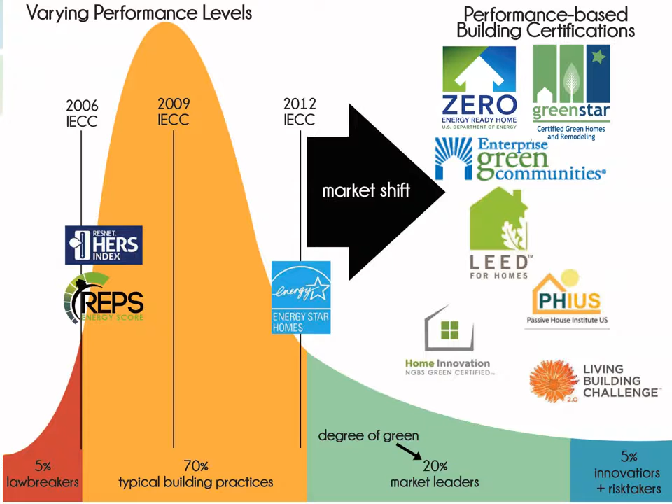So, as we go through this, it's about identifying where you see yourself. And so many of these programs fall into different levels, all the way from, on the left side of the bell curve, building and remodeling homes without following the energy laws, all the way to following the current energy codes, and then moving into the market shift, being a green leader, and then looking at the 5%, the risk takers. Which of these programs sort of delve into that 5%, and really where do you see yourself along this scale?

So we covered a lot about why green building, green home certifications, and then some of the baseline energy programs. And so what you'll find again is that each of these green rating systems that we're going to cover build on successfully utilized energy programs as their baseline. If they want to be successful, they usually model themselves and attach themselves to things that are working in the market.

So the first program I want to go over is the National Green Building Standard, which is a third-party green home certification that was developed by the National Association of Home Builders, and now has been handed off to the Home Innovation Lab, who, from a branding standpoint, you might not be able to tell, but they are an entity of the National Association of Home Builders.

So the first thing to note about the National Green Building Standard is its energy performance pathway baseline, and that's built on the International Energy Code Council's IECC 2009 iteration as its baseline for its mandatory energy requirements, which is just recently improved from the 2006 IECC, which is about a 15% energy efficiency improvement, just the baseline to National Green Building Standard.

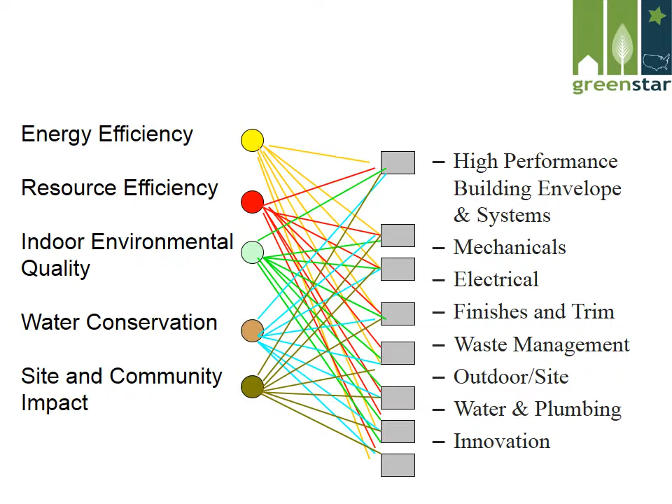All sorts of guidance. What this program is looking at is these 5 key concepts: energy, resource efficiency, indoor environmental quality, water conservation, site and community impact. And what it's looking at is how each of these affect the different systems in a home: high performance building envelope systems, mechanicals, electricals, finishes, trims, waste management. How does each of these 5 levels of green improve or maybe even harm one of the different sections of the house? And then Green Star gives guidance on ways that the tool can be utilized to make the best decision for a whole systems approach across the 5 key categories in each of the sections of the house.

The credit weightings, this is really heavy on energy, which makes a lot of sense. Most of your opportunities lie in energy, so about 50% of the points you're looking at are in your energy efficiency section, and then about 15%, give or take 5 or 7, are at water, indoor environmental quality, site and community impact, and resource efficiency.

Third-party inspections and auditing: in the past, if you're familiar with LEED Online, this program kind of worked like that, where the homeowner could submit a ton of documentation to Green Star admin, and they would review all of this documentation, and they might have a BPI rater or a HERS rater come by and do some testing. Now we're actually looking at third-party Green Star rater inspections, inspecting everything on the site, ensuring that everything that was installed is actually there, and then submitting that documentation to the reviewer in Minneapolis, and then actually having on-site quality assurance auditing being done on the raters.

Education resources: there's a free online training to use this program. You can go through that training at your own leisure. There's a free 400-page manual with guidance, along with a free checklist that you can download and utilize at any time. Once you go through the training, you'll probably find that you want to get qualified to work and certify an actual project. So there are some fees to that, and there are many different ways to get qualified depending on what your needs are. There's online live sessions, and then there's pre-recorded on-demand sessions that you can go through and take a test. You can do a design charrette on a real project for busy professionals. That's highly recommended. Or there's full and half-day trainings across the Midwest as well.

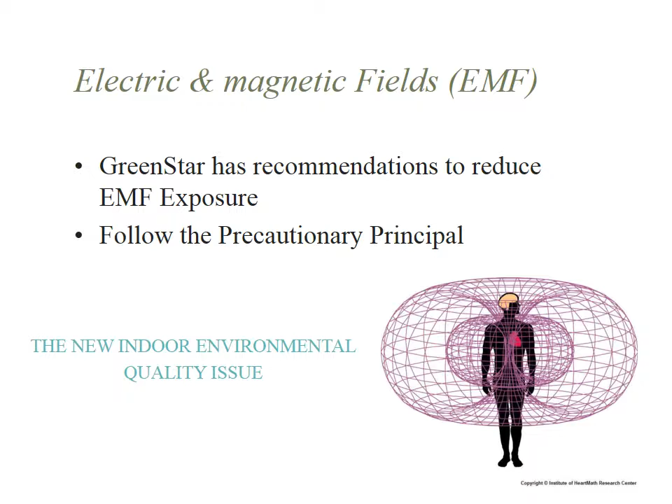And in summary, this is a regionally relevant program in cold weather. If you're in the Pacific Northwest, if you're in the Southeast, probably not for you. Best for light or moderate remodels or weatherization versus many other programs. It really has its strength there. It's much more affordable. It's non-political. It is membership and sponsorship supported and based, so that's a unique thing about it. It has a multifamily pilot underway. It has a recognized accreditation program focused on residential, and currently has a very complicated, cumbersome checklist, but upgrades are coming soon.

And of course, Green Star would want to give a shout out to other regionally relevant programs that are a part of the National Green Home Certified Coalition. So if you're doing a remodel or new home in the South, you probably want to use the EarthCraft program. If you're in the Pacific Northwest, check out Earth Advantage Institute and their great program. Green Built Texas, and Build It Green in California has some amazing tools.

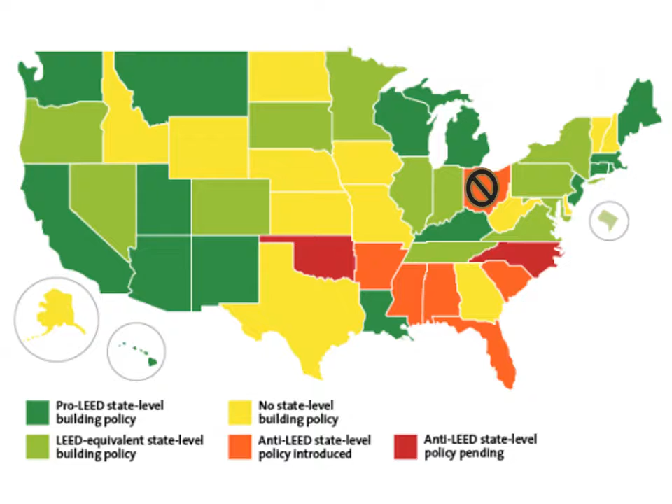LEED for Homes 2008, much like the new construction rating system, is slated to update to version 4. This has been held off and is now slated for October 31st, 2016. The current LEED for Homes version 4 is open. It's beyond its pilot phase, and you can use it now, but 2008 will no longer be available as of Halloween 2016. Some of the things to look for are Energy Star version 3 being the baseline to the program instead of version 2, which requires having a credentialed heating and cooling contractor, using the water management checklist, and then having an HVAC checklist as well.

It does remove the entire durability portion of the LEED program, which to some degree may make it easier. Another thing they're looking at is energy and water use monitoring is going to be a little more prominent. A little more of a life cycle analysis on the impact of the material choices in the homes. A little more focus on urbanization and access to community resources for LEED homes. By no means will rural homes be disqualified, but there'll just be more of a focus on that location efficiency,

urbanization. Water performance: they use the EPA's new water budget tool, which you can check out now if you're designing any kind of landscaping. You can't use it for the current LEED program, but there will be an entirely water performance indoor and outdoor pathway for the LEED for Homes rating system. And they have removed the LEED home size adjuster, but Energy Star 3 still has its own home size adjuster, which is kind of built into that. We do have more resources on our website for understanding the LEED for Homes version 4 process if you want to utilize it now.

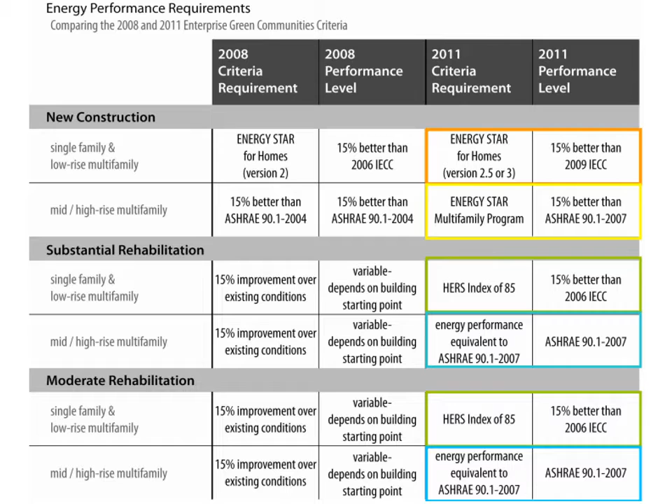Interestingly, there's a chart that we will provide as a resource here that kind of shows how the 2008 Green Communities compares to the new 2011 standard, and whether it's single family or multifamily, mid-rise or low-rise, and whether it's new construction, substantial rehabilitation, or a moderate rehabilitation. A lot of that can change the different types of energy scores you're going for.

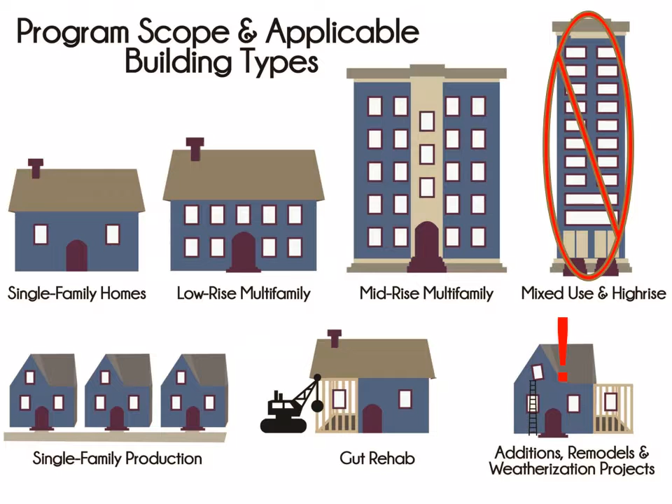Green Communities works on all sorts of building projects: single family, low-rise, multifamily, mid-rise, mixed use. If you're using mid-rise, you're using the ASHRAE standard, just like LEED, and doing energy modeling. Gut rehabs, and then again, additions, remodels, and weatherization projects can use the moderate rehab pathway under the Green Communities tool. Mixed use and high-rise really don't apply in this system. And at the end of the day, again, this is mostly developed for affordable housing developers.

So we're looking at the different sections of green: integrative design, water conservation, energy, location and neighborhood, operation and maintenance, healthy living environment, site improvements, and materials beneficial to the environment, which is what they name their categories. In Green Communities, you must comply with all of their mandatory criteria. They have a lot of prerequisites, just like LEED. Earn 35 optional points if it's new construction, or just 30 optional points if it's a moderate or substantial rehab. Compared to LEED or the National Green Building Standard, it just has quite a bit of prerequisites to get to this level

of certification at all. From a third-party standpoint, you're looking at a second-party HERS rater, which is often a third party, going in and doing at least the energy audit for the HERS index and then the Energy Star program. It's not required to have a third-party inspection unless they're audited for anything outside of energy. And I have never heard to this day of any Green Communities project ever getting audited. I think it's just something they plan on doing in the future.

Third-party documentation submittal, online review and feedback. So you submit through their online web portal tool. It's almost like LEED Online if you're someone who's coming from that world. There's lots of documentation you have to do, but at the end of the day, it is free to submit. So it's really great to take advantage of utilizing them and working with them if you have an affordable housing project that you're working

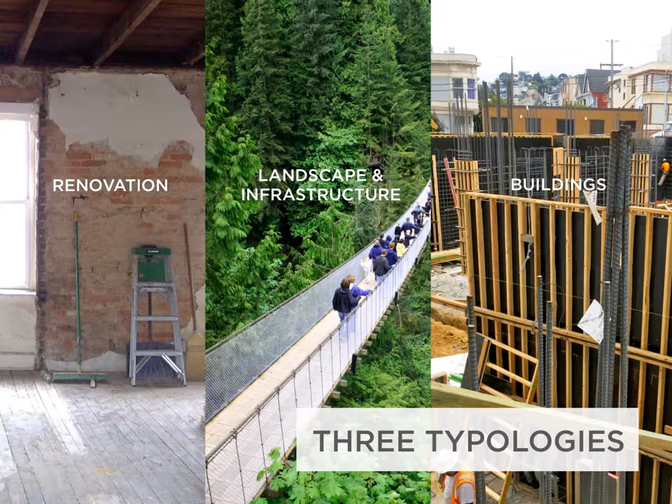The Living Building Challenge was developed by the Cascadia Green Building Council, who launched the International Living Future Institute out of the Pacific Northwest, and their mission is to lead and support the transformation towards communities that are socially just, culturally rich, and ecologically restorative. These programs can be used on renovation projects, land and landscape and infrastructure projects, and obviously whole building.

There are some differences on where you are building, and you have to identify that, all the way from a natural habitat preserve to a rural agricultural zone, all the way into L6, where you're in an urban core zone like downtown New York. So depending on where you find yourself, there are some different ways that you have to build on your project. This program is applicable to essentially everything. It even has a neighborhood scale, so you can use it on any type of project, especially with what we're talking about on the residential.

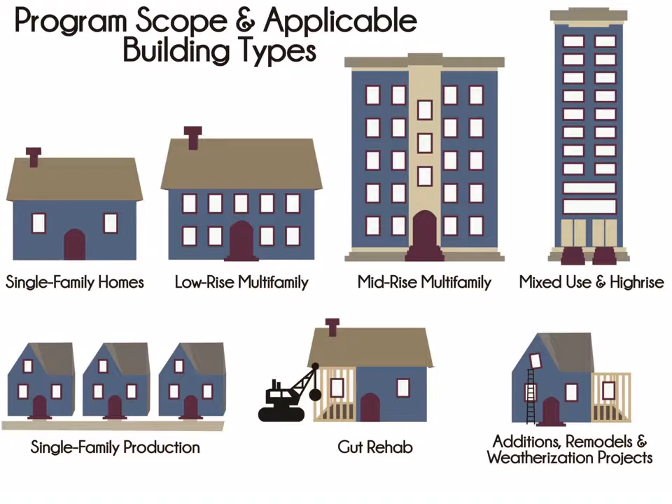So the Living Building Challenge metaphor is the flower, and it's broken down into petals. We've got place, your relationship to the space that you're in; water, which is essentially net zero water, black water remediation; energy, which is essentially net zero energy, commissioned systems. Health and happiness is interesting, so they're looking all the way from air quality and doing air quality testing after the project is done, to mental well-being, such as how are people connecting with nature in the space, is biophilia present, is there that increase in mental health.

Materials is a very tough petal to achieve. We're looking at essentially non-toxic, more regionally sourced materials that have a life cycle analysis, trying to determine where they're going to go at the end of their life. So, for example, PVC is not allowed. So there's some issues there with electrical wiring, with roofing.

And then, interestingly enough, this program departs here from other green building programs when it gets into the equity and then beauty aspects. So, a socially just project. How does your building lend to the culture of the area? Is the building beautiful? It needs to be verified to fit into the neighborhood that it goes into and not be an eyesore or negative.

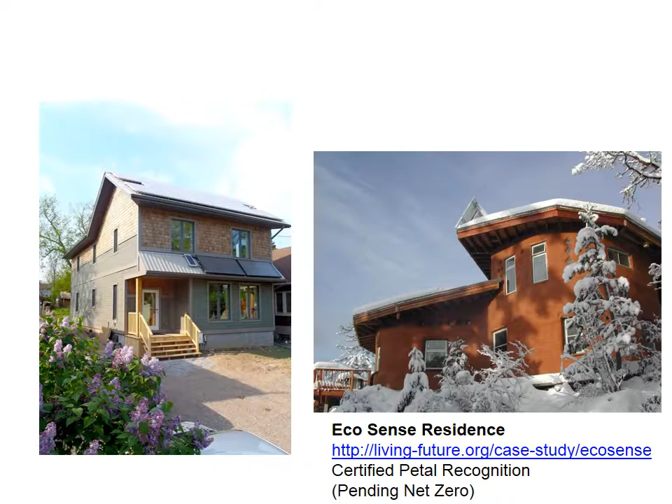We're real excited to be working with the Burbeck at Beacon Springs project. This is hopefully the first Living Building Challenge home around Ann Arbor, Michigan, within Michigan, that's underway. A really exciting project. The Nest is going to be a gut rehab Living Building Challenge in the Baxter community of Grand Rapids, Michigan, helping people in a food desert learn how to eat better and connect with their own food, and growing their own food locally.

And then a summary of the programs. The Living Building Challenge is the most difficult yet rewarding green building program. So they call it a challenge for a reason. Currently, it's mostly being used for small research facilities and schools. That's where most of the certifications and projects are taking place. And again, most are happening in the commercial world, though we showed you some examples of residential.

And one of the neat things about this program is it's got a lot of continual progress. So maybe the first year you get petal verification within your materials choices, and then maybe the next year you're able to hit net zero energy once you're able to add all the PV, and then maybe the next year you're able to capture and clean your own rainwater, which a lot of code can get in the way of, and so that might be something that you look to on the horizon and take it as a sort of staggered approach.

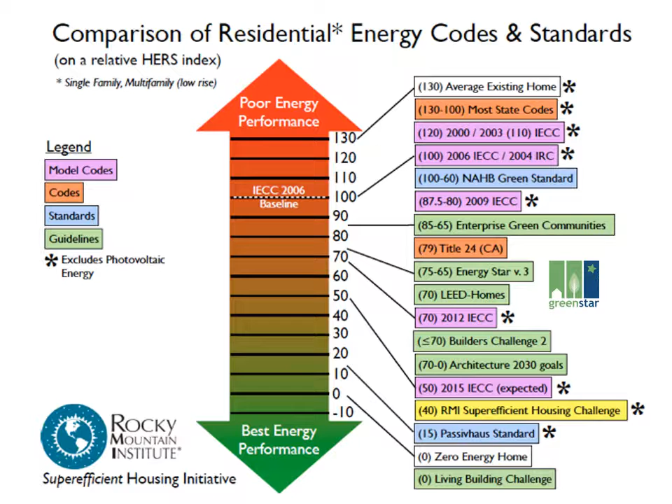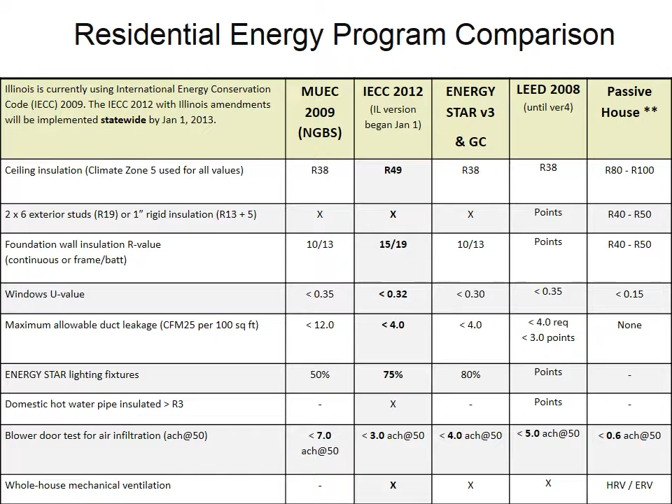This will be in your handout too. We're not going to cover this too much here, but it is a quick comparison in the state of Illinois. This will be more state neutral for you all, of each of the prescriptive pathways for energy requirements in each of these different programs and what is necessary as far as R value or construction type to achieve it.

Water conservation requirements, you can see Living Building wins that program out, second only with WaterSense certification, focusing on WaterSense. Zero Energy Home, PHIUS all have to go through WaterSense. Green Communities, LEED, Green Star, certainly tons of points if you can achieve this high level of water, but it is not required, and then a little less in the Home Innovation Lab as far as water requirements.

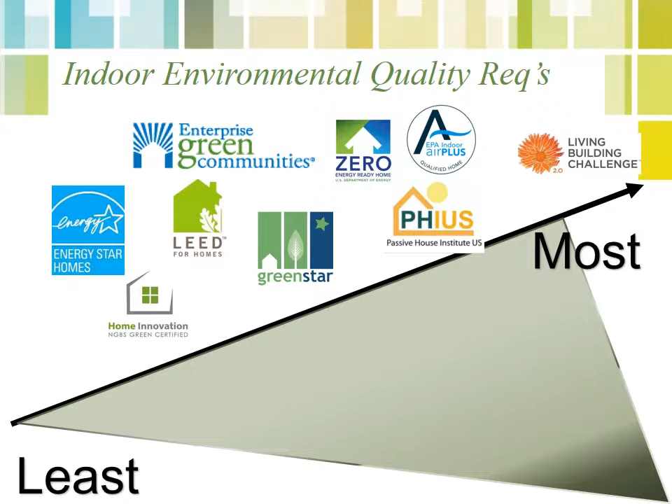On the indoor environmental qualities, we've got Living Building Challenge coming in with that air quality testing assurance, but then otherwise really good prescriptive approaches from the EPA's Indoor airPLUS program, which again is required in the Zero Energy Ready Home, also in PHIUS, all the way down to the bottom where the Energy Star program doesn't really have indoor air quality protocols, though they do have durability and moisture strategy protocols which can mitigate moisture, mildew, and rot. So there is at least something there from that program.

Material resource efficiency, durability, utilization of materials. Again, this is where these programs, PHIUS, the Zero Energy Ready Home, Energy Star, sort of fall short. They don't really address these kind of items, and this is where the green building certification programs really shine, as well as the Living Building, obviously with the red list. This is one of the hardest things to do in Living Building Challenge, is meeting the materials requirement.

Site and community impact, again looking at landscaping, how you affect your neighborhood, how you affect your community. Not something that you look at in the Zero Energy Ready Home or PHIUS or Energy Star programs. Something a little bit differently addressed by the green building programs. And then of course you've got Home Innovation and LEED, both have actually green community type programs, neighborhood development, which would be probably right around here.

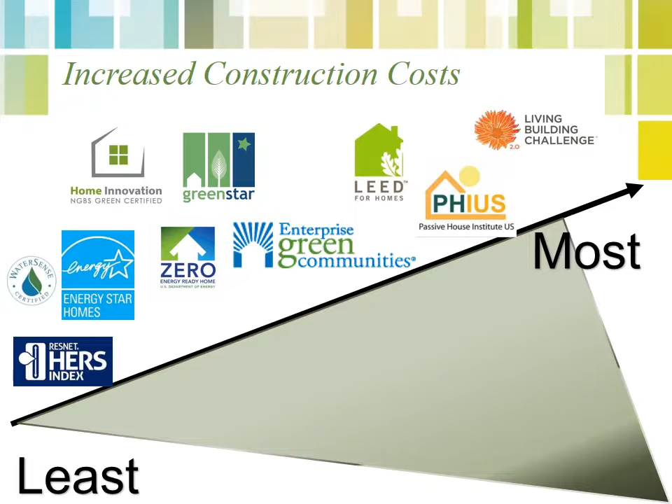Increased construction costs also are here. So looking at Living Building Challenge with a 20 to 30% construction cost add-on, LEED maybe around 0 to 10%, even less, and then even less as we go down. Though, interestingly, depending on what level of certification you are trying to achieve, that can really change the different types of costs here, all the way down to the HERS index, which is just going to cost your basic number for a rater coming in. But if you get a basic HERS score, that could be no extra cost for the type of insulation and

air sealing you're doing. If you're looking for some detailed credit comparisons for each of these programs, the Home Innovation Lab has done some comparison from National Green Building Standard current version to LEED for Homes version 4. Enterprise Green Communities has some great comparisons on how they compare to National Green Building Standard, LEED for Homes, and then how they compare to LEED for Homes Midrise and the EarthCraft program out of the South. And then the United States Green Building Council is going to be launching a comprehensive comparison of the newest National Green Building Standard, Home Innovation Lab, versus their V4. I've actually assembled some of these comparisons for you in the handout resource packet, so you can read through that and access it, or certainly go to their websites to get more up-to-date information there.

If you're looking for unbiased information done by third parties, there are certainly some great resources. The one I want to point out here is the Green Builder Coalition. If you go to greenbuildercoalition.org/GBA, and if you become one of their members, you can get this really cool line by line, credit by credit comparison of National Green Building Standard to LEED for Homes, or you can compare each of these together to the current Energy Star version 3 program. So go ahead and check that out if you're interested in a really in-depth credit by credit review.